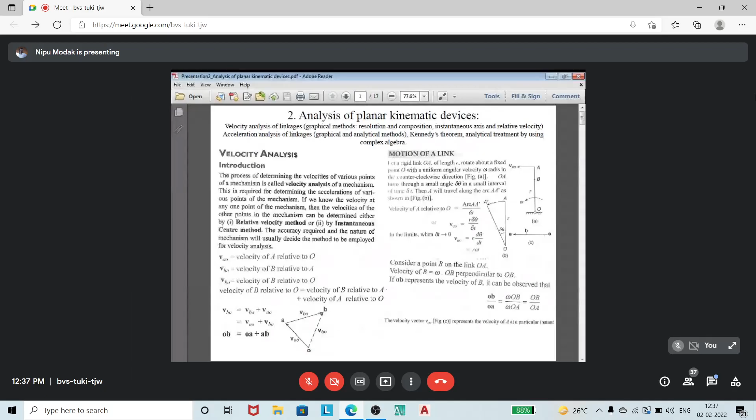Okay, you can find the velocity of intermediate point B. This will be the velocity relative to O equal to velocity A relative to O into OB by OA. OB is the link length of the portion of B from the respective point O. So you can find also the intermediate point velocity of any intermediate point of a linkage.

Now you draw the velocity diagram of the four-bar linkage mechanism. So here A, B, C, D, this will be a 4-bar linkage where AB is known as the crank, and BC is known as... what is the name of the link?

BFC. What is the name of this link?

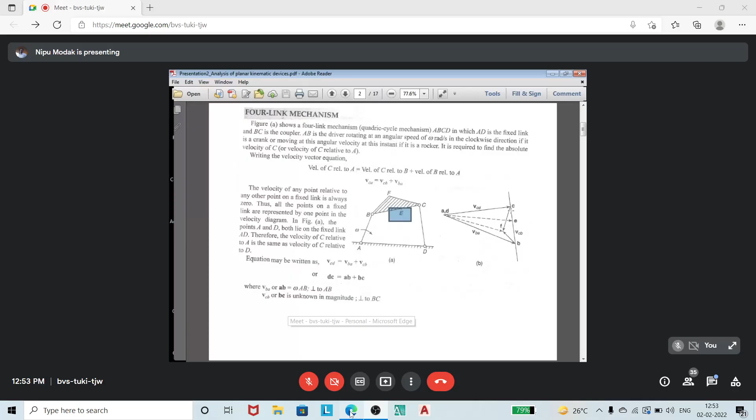Again you can find the angular velocity of the link of BC. Velocity, angular velocity, how can we determine it? Suppose you can find angular velocity of the link of BC, so you know VC relative to B divided by the link length of the capital BC, so that will be the angular velocity, because you know that velocity equals radius into angular velocity, so angular velocity equals velocity by radius, radius means link.

So again you can find the angular velocity. This link length, or this link, is the same link's angular velocity - that is the same, but this link has a different angular velocity. You can determine velocity C relative to D, that means VCD divided by the link length of the capital CD. So you know the angular velocity of the link of the capital CD.

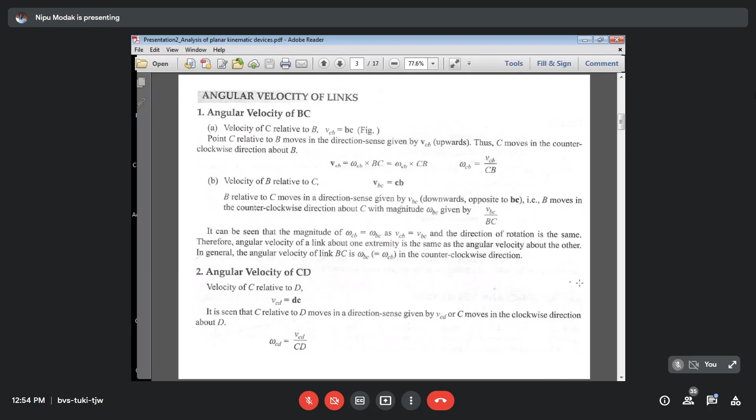So the angular velocity of the link of BC, or the angular velocity of the link of CD, you can determine easily. So after getting the velocity diagram...

Now next you find the rubbing velocity. So it is also very important, rubbing velocity. Basically it is the turning pair, means the pin and hole. So link 1 and link 2, when they are joined, one having a pin, another having a hole - male part and female part, they are attached with each other, therefore you can find the rubbing velocity. So rubbing velocity depends on the angular velocity of these two links. And now you can find, if one is fixed and the other link is moving, therefore the angular velocity into the radius of the pin, that is known as the velocity of the pin.

You can see this figure. This will be the fixed pin. So therefore angular velocity of the link of AD equals 0. But at that point B, the angular velocity basically depends on the direction of rotation of the link of BC and AB. So you can also find the rubbing velocity at point A. You can write the pin radius - pin radius means this pin, this is the pin. Radius into angular velocity of the link 2, that is known as omega into RA.

At D, that will be the same thing, RD into omega CD, and you can find the rubbing velocity at point B, rubbing velocity at point C. One rotates in a clockwise direction, another rotates in an anti-clockwise direction. So you can find the resultant value - clockwise direction plus anti-clockwise direction.

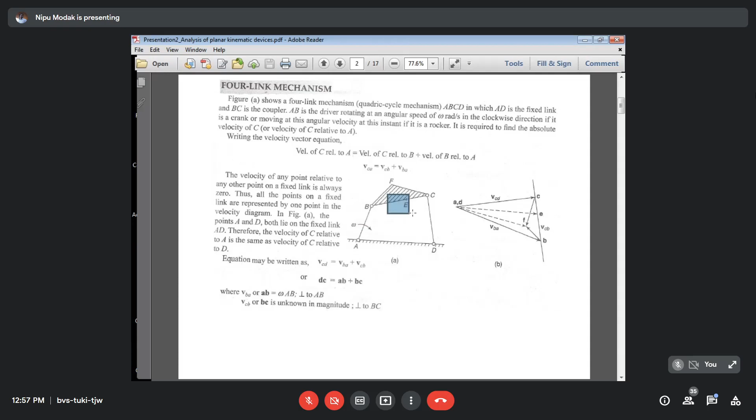So it is written as the point of B, the rubbing velocity is RB into omega AB plus omega BC. Similarly at the point of C, it will be the angular velocity equals to RC into omega BC plus omega DC. At the D point and A point, it will be the fixed point, because here angular velocity means omega AB. The pin radius RA into omega AB. Similarly, pin velocity means RD into omega CD.

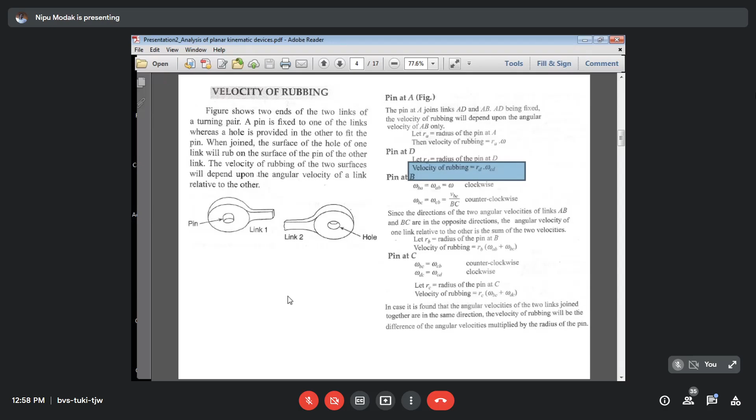Now next, you draw the velocity diagram of the slider crank mechanism or crank and slotted lever mechanism. So for velocity of a slider crank mechanism, you see that. This is the figure which will be known.

Known figure means angular velocity of the crank AB, that is known. OA is known as the crank. Angular velocity of OA is known. Link length of OA and link length of AB, that also known. You can draw the velocity diagram.

So here you can choose the point of A or G, O and G. O point is a fixed point, G point also a fixed point. B is known as the slider. AB is known as the connecting rod, and OA is known as the crank. You know that O and G point is the fixed point. You can choose anywhere on the exercise book, O, G.

Now next you draw the perpendicular line of the link length of OA, because the velocity of A relative to O will be the tangent of the circle. That means the diagonal of this box, or tangent of the circle. So at the point, you draw the velocity - it will be the tangent of the circle, meaning perpendicular to the link length of OA. So this line is basically perpendicular to the link length of OA. But what will be the magnitude? The omega value is known, and the OA length is also known.

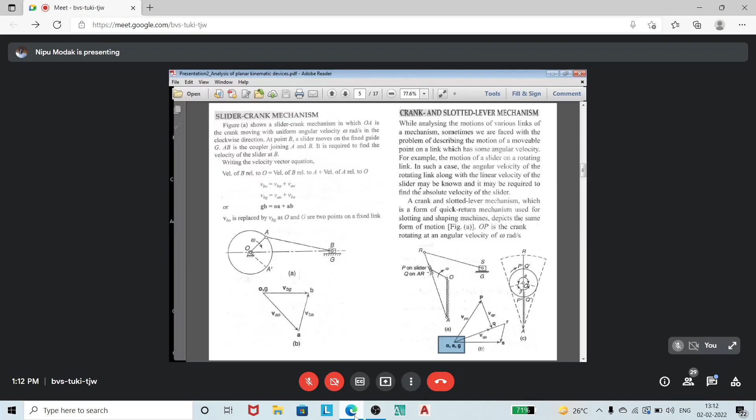In the lever mechanism, find the velocity of P, of the crank, which will be perpendicular to the link length OP. So this line is basically perpendicular to the link length OP, and the magnitude you also know, omega into OP - so you will get the point P.

Now next, the point where P is known, you have to find the position of small r on the velocity diagram. From the point of small a, you draw the perpendicular line to capital AR, the perpendicular line of AR from the point of small a.

Now next, P is known as the slider, it will move, so this will also be the path of AR. You can find the velocity along the path of AR - from the point of P, you draw a line parallel to this line.

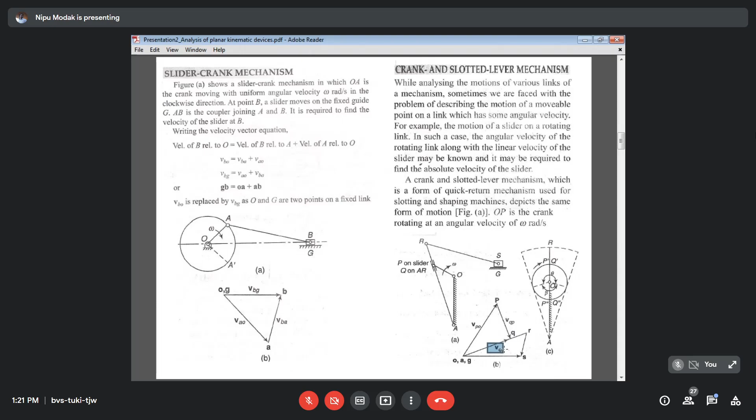Now next we come to the velocity analysis by instantaneous center method. This can be determined - you can see there will be an imaginary center where the whole link rotates at a point, that is called the instantaneous center.

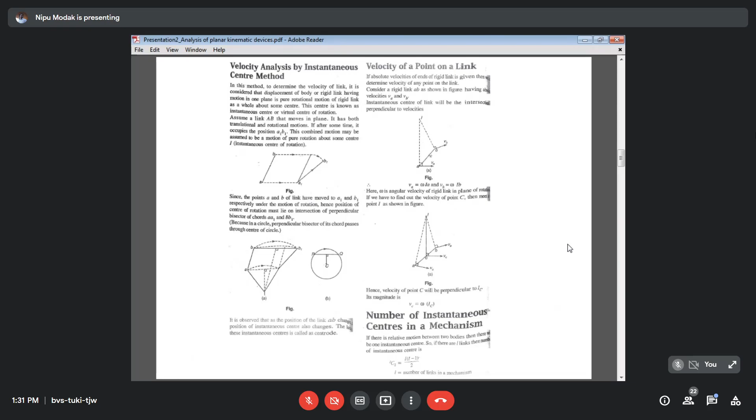Now consider the number of I-centers, written as n into n minus 1 by 2, where n is the number of links. Suppose the number of links equals 3. So 3 into 3 minus 1 by 2, that gives 3. So you can determine that the number of I-centers will be 3.

So here the three bodies, when link 3 is fixed, that means the number of bodies or number of links, the number of I-centers is also 3. So the 3 I-centers must lie on a dotted straight line.

Now you know there are different types of I-centers. There are 3 types of I-centers. First one is known as the fixed instantaneous center. Second one is known as the permanent instantaneous center. Third one is known as neither fixed nor permanent instantaneous center.

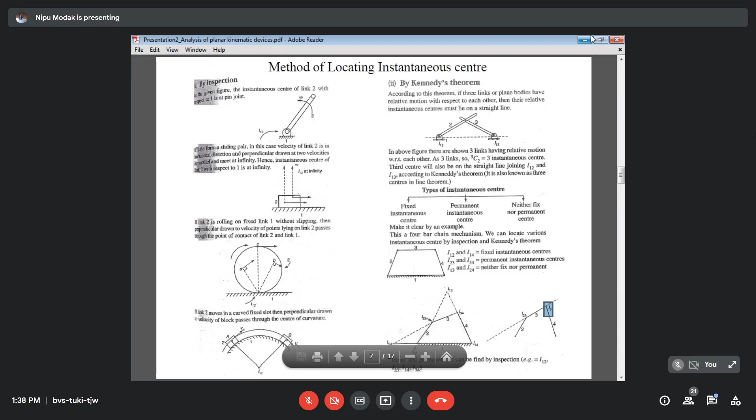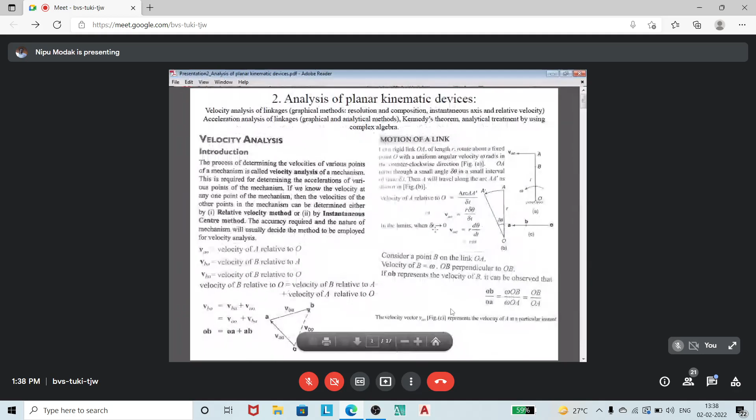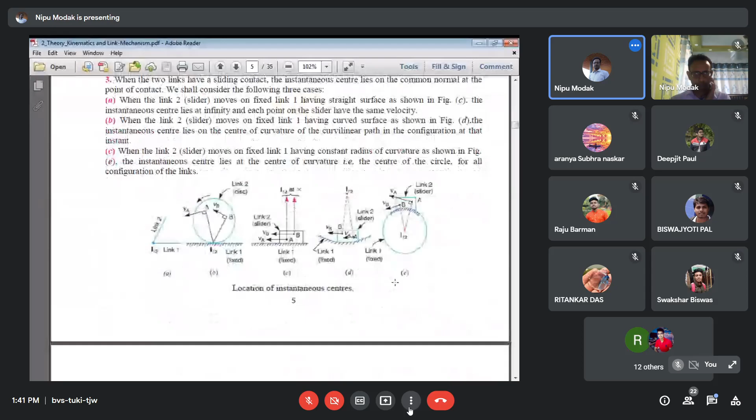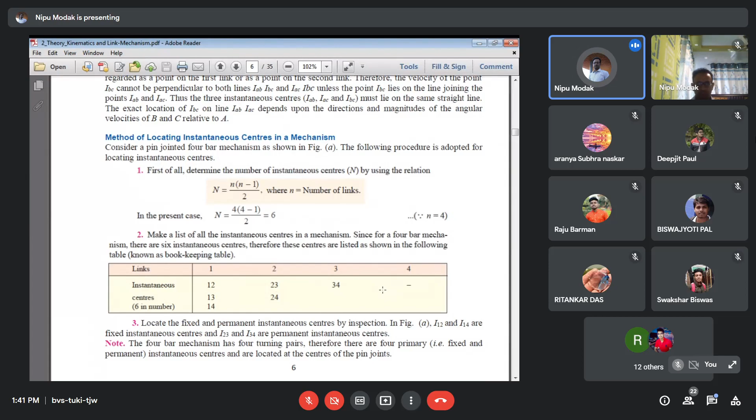Here the number of instantaneous centers N equals n into n minus 1 by 2. Suppose the number of links is 4, that means 4 into 4 minus 1 by 2 equals to 6. How can you find this? So here, instantaneous center, you can draw this one.

First you write here 1 2 3 4. The 1 and 2 will form the first I-center. Next you can write 2 and 3. The 2 and 3 will be the second. Next you can write 3 and 4, it will be the third.

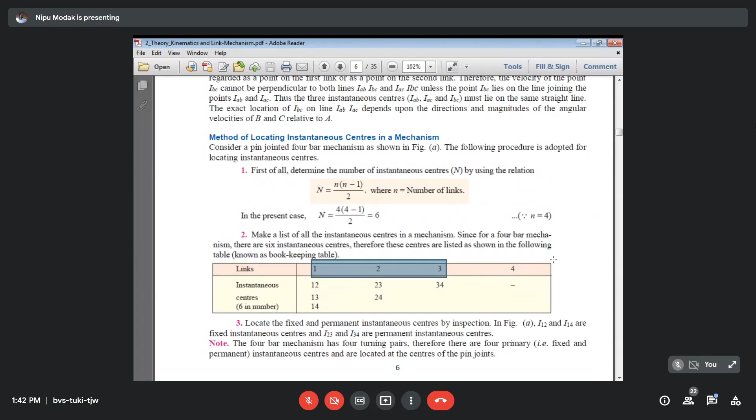Similarly, you can write also 1 and 3, that will be the fourth I-center, and 2 and 4, sorry, 2 and 4, it will be the fifth I-center. And the last one you can write 1 and 4, that will be the sixth center. So it's very easy to write the names of the I-centers: 1 2, 2 3, 3 4, 1 3, 2 4, and 1 4.

Now write in your exercise book, when the number of links equals 5, how many instantaneous centers are there? Find the naming of these instantaneous centers using the same method, when there are five links.

এরপর ফার্স্ট রো, সেকেন্ড রো, থার্ড রোতে কি হচ্ছে বলো।

So here the number of centers equals 6, meaning in case of the 4-linkage mechanism, n equals number of links equals 4. Therefore, the number of I-centers, capital N, equals n into n minus 1 by 2, that equals 6. Okay, what is the name of the I-center?

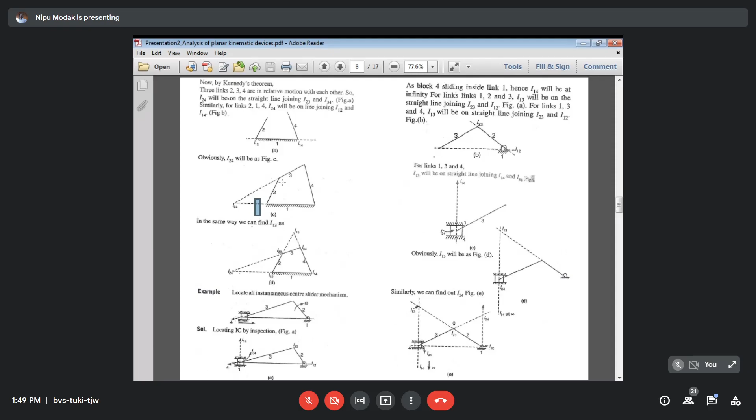স্যার তার মানে কি আই সেন্টারগুলো কোলিনিয়ার হয়? কেনেডিস থিওরেম অনুযায়ী যদি তিনটে লিঙ্কের ক্ষেত্রে আই সেন্টার সবসময় একটা লাইন বরাবর থাকবে, তাহলে 1 2 4 এইটাকে হিসাব করলে আই সেন্টারটা যে লাইনে আছে, তার মানে 1 2 4 করলে এই একটা আই সেন্টার, তার মানে থার্ড আই সেন্টারটা এই লাইনের উপরই হবে, বাট আই ডোন্ট নো কোথায় হবে।

আবার যদি আমি 2, 4 আর এই লিঙ্ক এই তিনটেকে ধরি, তাহলেও দেখতে পাচ্ছি কমন আই সেন্টার I24, সেকেন্ড আই সেন্টার পেয়েছি, তাহলে থার্ড আই সেন্টারটা এই লাইনের উপরে কোনো একটা জায়গায় হবে। এই দুটোই যদি একই লাইনের উপরে হবে বলছি, তাহলে দুজনের কথাই ঠিক। তার মানে দুটো পয়েন্ট যে লাইনে ইন্টারসেক্ট করলো, দ্যাট ইজ নোন অ্যাজ দ্যাট কমন আই সেন্টার I24।

মানে স্যার বোথ সাইড আমরা কেনেডি লাগাচ্ছি, মানে কেনেডি থিওরেম অ্যাপ্লাই করছি। এক্স্যাক্টলি।

এবার এইটাকে আমি জিজ্ঞেস করবো, ফার্স্ট ইউ কনসিডার দ্য লিঙ্ক অফ 1, 3, 4, অর্থাৎ I134 বা I14, I34। স্যার ওই স্লাইডার ক্র্যাঙ্ক মেকানিজমটাই বলছেন স্যার? মানে সেকেন্ড এক্সাম্পলটা?

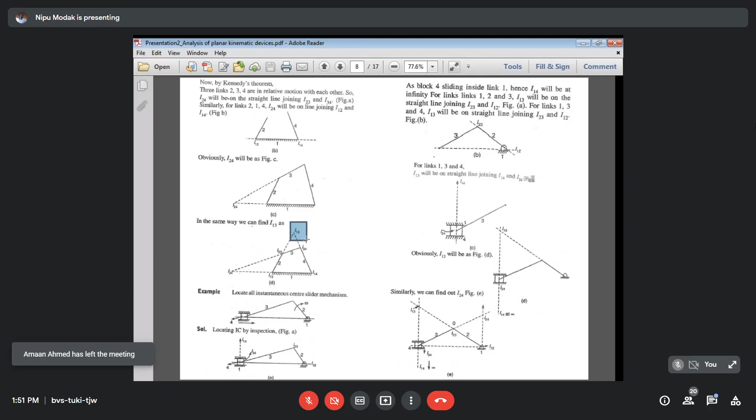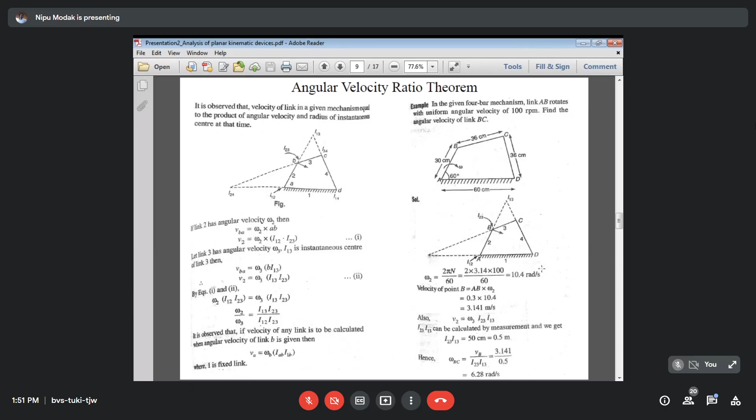এটা কি করে পাবো বার করো তো। I14 টা নিচে, I34 টা উপরে, তাহলে ওই লাইন বরাবর একটা থাকবে। দুটো লাইনগুলোকে এক্সটেন্ড করে দিলে তো প্রথম ওই I13 টা পেয়ে যাচ্ছি। হ্যাঁ, নিচে দুটোকে চেঞ্জ করে দিলে তো ইজি হয়ে গেল, কিন্তু এই প্রবলেম তো তোমার থাকবে না, তোমাকে ব্যাপারটা বুঝতে হবে। তোমাকে তাহলে প্রবলেম দেখাচ্ছি, যে প্রবলেমটা থাকবে সেটা প্রথমে দেখে নেওয়াটাই বেটার, তোমার ক্ষেত্রে আর একটু ইজি হয়ে যাবে। কারণ ওটা দুটো পয়েন্টকে জয়েন করে দিলাম, ভাবলাম এরকম তো ব্যাপারটা নয়।

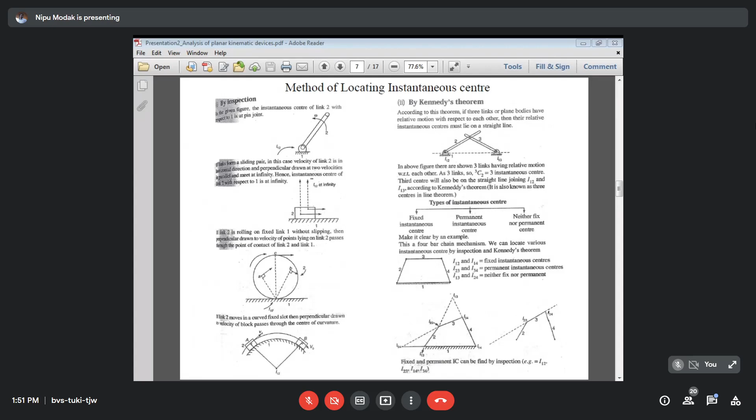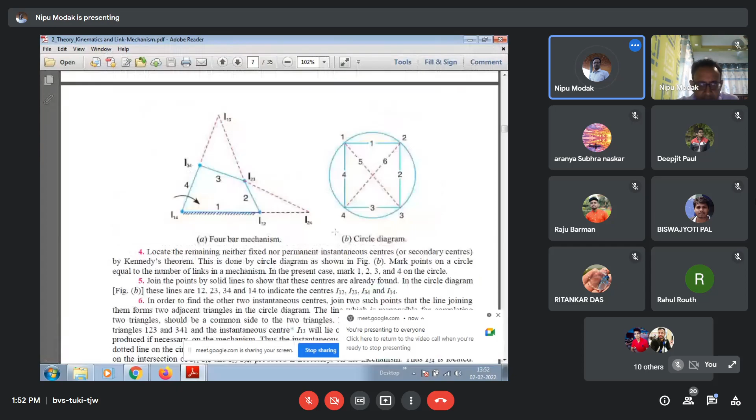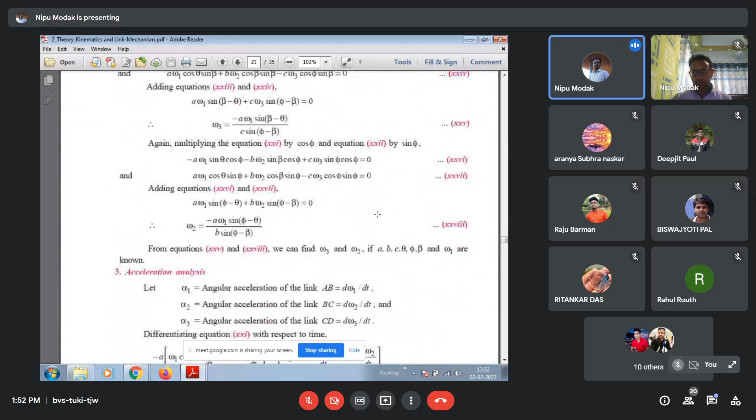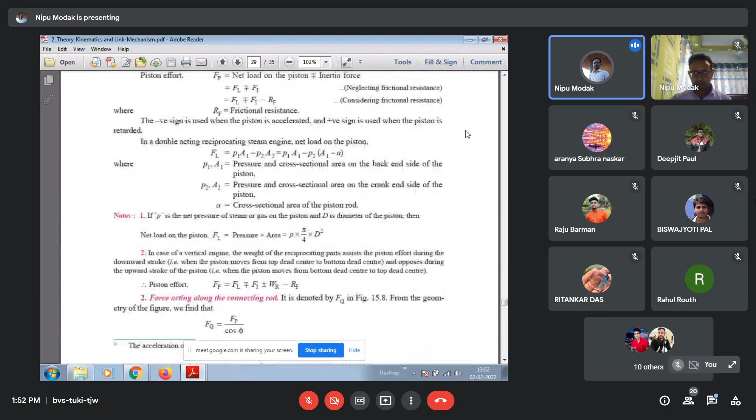ঠিক আছে, এইবার যদি আমি এই প্রবলেমটা দিই। একটা প্রবলেম একটু কমপ্লিকেটেড দেখাচ্ছি, যেটাতে করলে তোমাদের অনেক ক্লিয়ার হয়ে যাবে। দেখি এটাতে আছে নাকি একবার, আপনি একটু হোল্ড করো।

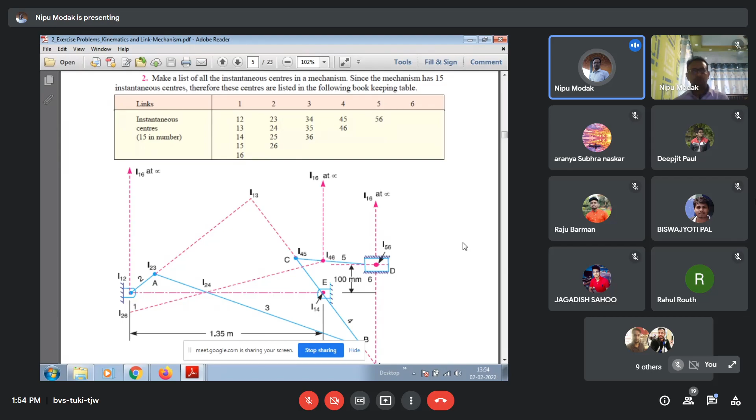এবার দেখো, এবার তুমি বলো তো এটা কোনখানে কোথায় আই সেন্টার হবে, তুমি কি এবার বার করতে পারবে? দেখো তো। তোমাকে লজিকটাকে প্রথমে এস্টাবলিশ করতে হবে। Yes sir, অনেকটা কমপ্লিকেটেড। হ্যাঁ সেই জন্যই বলছি, তুমি আগে ব্যাপারটা ফোর সেন্টার মেথড বলে, ওটাকে দুটোকে এক্সটেন্ড করে দিলাম আই সেন্টার, এই ব্যাপারটার মধ্যে বুঝলে কিন্তু তোমরা বুঝতে পারবে।

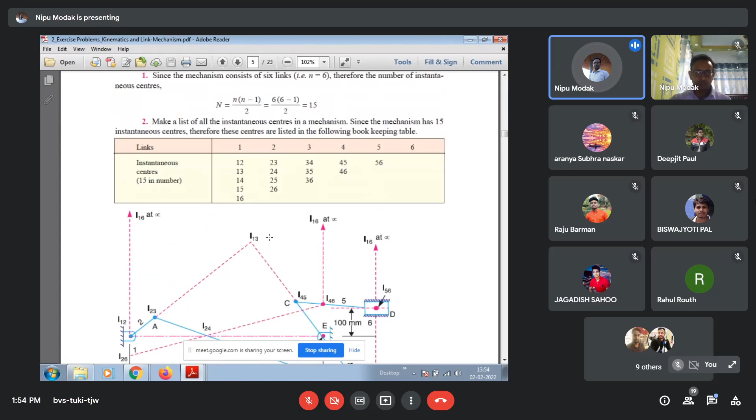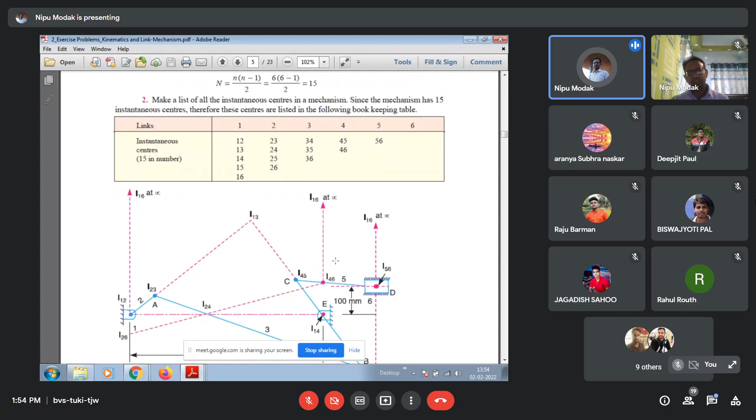আমি সেই জন্য একটা সিম্পল এক্সাম্পল নিয়ে ধরেছিলাম যাতে ইজিলি বুঝতে পারো। এখানে তোমার এতগুলো আই সেন্টার রয়েছে, নাম্বার অফ লিঙ্ক হচ্ছে 6, তোমার 15টা আই সেন্টার বেরিয়েছে। 15টা আই সেন্টারের পজিশন বার করবে, কোনটা কোথায় কি নেম আছে তা জানতে হবে। এই গাড়ি তোমাকে দেখাচ্ছি, এখানে এই আই সেন্টারটা ইজিলি তুমি নামকরণ করতে পারবে যেহেতু ফিক্স লিঙ্ক আর 2 নম্বর লিঙ্ক, তার মানে I12, এটা হচ্ছে I23, আর এইটার পজিশন আমি জানি না। এইটা হচ্ছে I14, I45, I56 আর I34। এইগুলো তুমি জানো, বাদবাকি কোনো আই সেন্টার তুমি জানো না, তোমাকে বার করতে হবে। সেই জন্য প্রসেসটাকে একটু কনসেন্ট্রেট করো, তাহলেই হবে।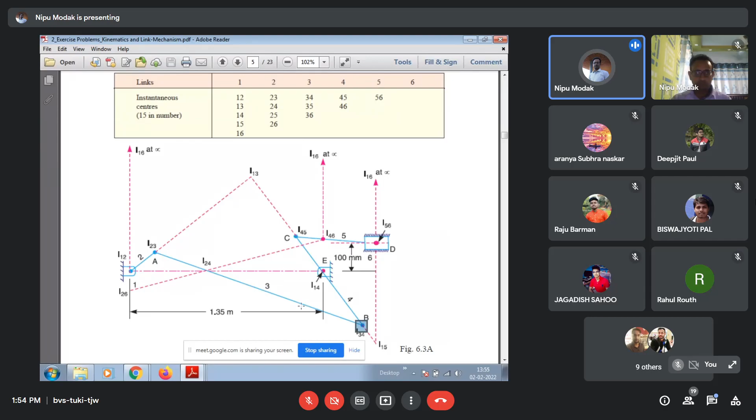আমি এটা বোঝাচ্ছিলাম, তাই তো?

দেখো, আমি বললাম যে ইউ কনসিডার দ্য লিঙ্ক 1, 4 and 3। জাস্ট খাতায় লেখো 1, 4 and 3। তাহলে আই সেন্টারের নাম কি কি হচ্ছে? নেমিং অফ দ্য আই সেন্টার হবে 1, 4, 4, 3 and 1, 3।

দেখো 1, 4 আর 4, 3 আর 3, 4 এটা আমরা পেয়ে গেছি, কিন্তু 1, 3টা জানি না। তার মানে 1, 3 লাই অন দিস দ্য লাইন, এই লাইনের ওপরে কোন একটি জায়গায় আছে, ডোন্ট নো। সেকেন্ড, আমার 1, 3 বেসিক্যালি এখানে ফ্যাক্টর, তার মানে হচ্ছে 1 নম্বর লিঙ্ক আর এই লিঙ্ককে বাদ দিলে হবে না। বাকি যে কোনো লিঙ্ক আমরা দিতে পারি।

সেকেন্ড লিঙ্ক যখন কনসিডার করব। আমি প্রথমে কনসিডার করলাম 1, 4 and 3। তাহলে এখানে আমি একটা লিঙ্ককে বাদ দিতে চাই, কোন লিঙ্কটাকে বাদ দেবো? আমার 1, 3টা দরকার। 1, 2, 3 নেবো, তখন 4টা বাদ চলে যাবে। তাহলে 4টাকে বাদ দেবো, 1, 2, 3। খাতায় লেখো যে 1, 2, 3। যদি আমার এই 3টে লিঙ্ক হয় তাহলে আই সেন্টার কি হবে? 1, 2, নেক্সট হচ্ছে 1, 3, আর একটা হচ্ছে 2, 3।

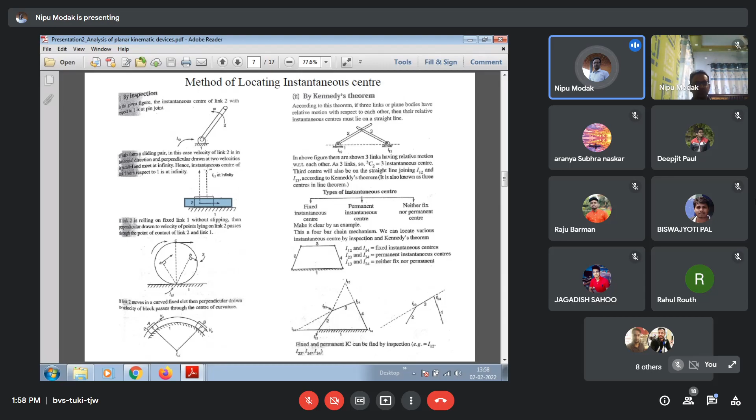Eye center কি কি আছে? একটা হচ্ছে this eye center is known as the 1, 2. eye center it is known as the 2, 3. 3 and 4 এর connection is the I34, but 1 and 4 এর connection instantaneous center হবে infinite position। আগের ফিরে আমি দেখিয়েছি, এই যে এখানে যদি স্লাইডার it will move along straight line path that the instantaneous center, it will be placed at that infinite position।

Similarly, if you consider slider 4 moves along the fixed link 1, therefore that the I center which will be placed at that infinite position। এই প্যারালাল থিওরেম বলছে যে এই আই সেন্টার যেমন এইটা এই লাইনটাকে আমি এইখান বড় বড় ড্র করতে পারি, সেম মানে বোঝায়, মানে আই সেন্টার ওয়ান পজিশন অন দিস লাইন আর অন দিস লাইন বোথ আর দ্য সেম মিনিং।

এখানে কিভাবে আমরা বার করছি সেটাই এখন দেখা যাবে। সাপোজ ইফ ইউ কনসিডার দ্য লিঙ্ক 1, 2 and 3, খাতায় লিখো তাহলে আরো ক্লিয়ার হয়ে যাবে যে if consider the link 1, 2 and 3, যদি 1, 2 and 3 তাহলে আমার তিন সেন্টার কি কি নাম হবে একই বলো।

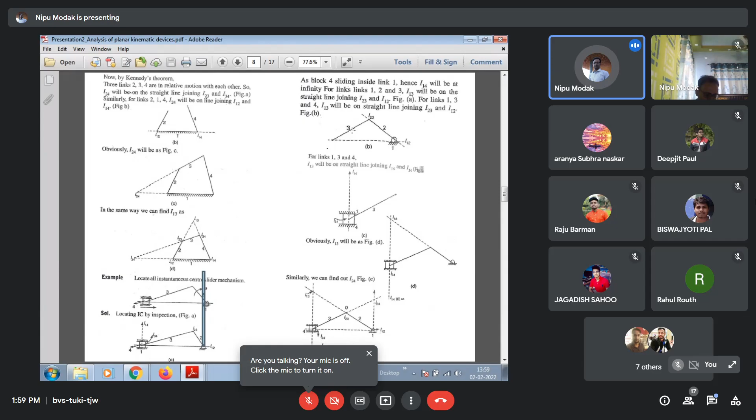1, 2, 1, 3 and sorry, 1, 2, 2, 3 and 1, 3, yes, তাহলে এখানে এইবার দেখো তোমার কিন্তু 1, 2, 2, 3 আছে, তার আছে এখানে 1, 3 টা আননোন আছে। I don't know what position of 1, 3, but I know 1, 3 will be placed on this straight line, on this straight line it is thus placed on the straight line।

এবার কি করলাম যে এক আর তিনটে সরালে হবে না কোনোভাবেই, তাহলে 1 নম্বর লিঙ্ক নিলাম, 4 লিঙ্ক নিলাম আর 3 নম্বর লিঙ্ক নিলাম, তার মানে 1, 4 আর 3 যখন লিঙ্ক নিলাম তার মানে আমার আই সেন্টার থাকবে, একটা হচ্ছে 1 and 3 এর মধ্যে আই সেন্টারটা হচ্ছে, 3, 4 আর 1, 4 এর আই সেন্টার which will be placed at that infinite position।

তাহলে আরেকটা আমি কি বললাম যে তিনটে লিঙ্ক 3, 1 and 4 যদি নিই, তার মানে একটা আই সেন্টার হচ্ছে 1, 3, পরেরটা হচ্ছে 1, 4, আর একটা হচ্ছে 3, 4। এখানে 1, 4 and 3, 4 পেয়ে গেছি, দেখো 3, 4 পেয়ে গেছি আর 1, 4 ও পেয়ে গেছি, তাহলে একটা আই সেন্টার পড়ে থাকছে যেটা হচ্ছে 1, 3।

তাহলে 1, 3 ইট অলসো মাস্ট লাই অন দিস দ্য লাইন। আগের লাইনে যে 1, 3 টা এই লাইনে আছে, এখন বলছি যে 1, 3 টা এই লাইনে আছে, তার মানে বেসিক্যালি this line and this line, this one, it will intersect at the point, it is known as that I13।

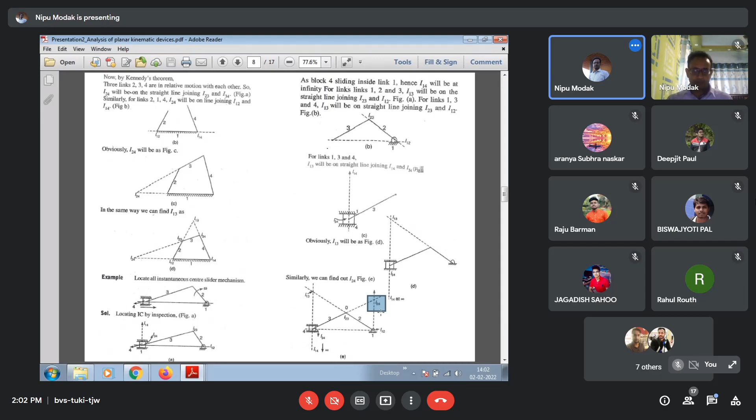So that will be the position of the center. Yei position pelam, next you draw this the velocity, how can you find the values of the velocity? So velocity, it will be the relationship, it will be easily established, that will be omega 2 by omega 3 equal to I1323 by I1223.

Hello. ঠিক আছে ঠিক আছে। হুম হুম হুম।